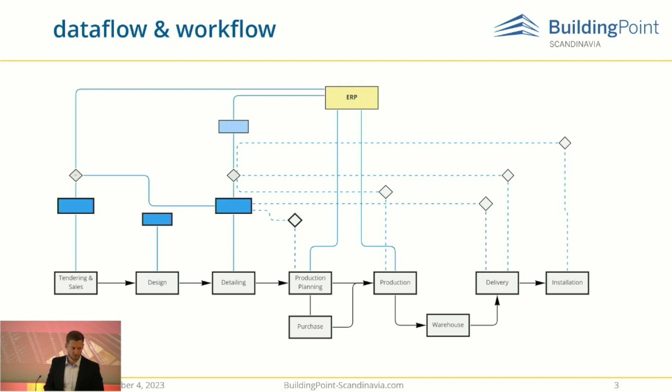Now let us jump into the Tekla part. I would like to show today Tekla when it comes to modeling, and it applies to any kind of elements, but most importantly it applies also to reinforcement. You have the possibility of creating those elements in 3D, but you also have different degrees of automation, depending on your need or your advancement.

So we can see there is manual modeling, which means that you can manually, in the 3D model editor, create the shape of the rebars exactly how you need. You can do all the reinforcement manually like that, and it's good, it's intuitive, and it's user friendly. But of course, if you need to do it every time, it will take too much time.

So you have something called custom components - it's a kind of small application that does this repetitive work for you, to make it faster and exclude errors. And if I manage to, I'll jump into Tekla so I can show it.

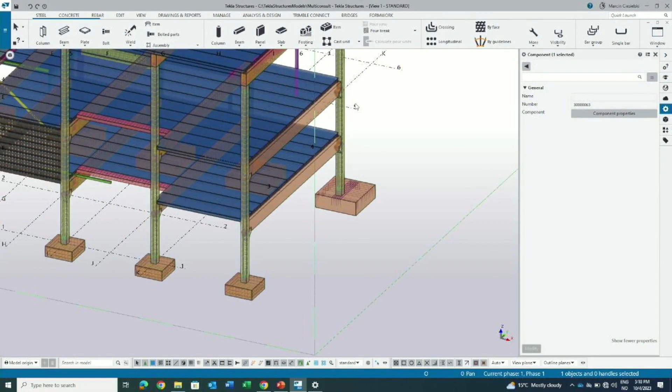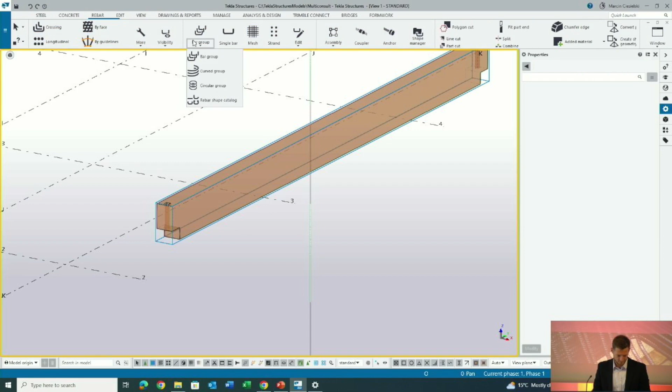There we are. Okay, so just briefly I would like to show how it looks. So basically, when we have a model - it won't be a full demo, just a quick look - we can create rebars manually.

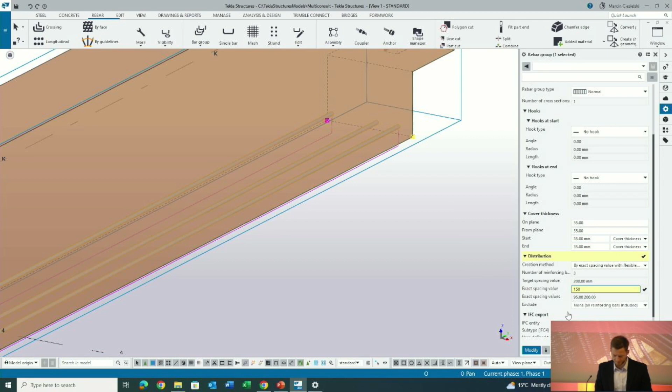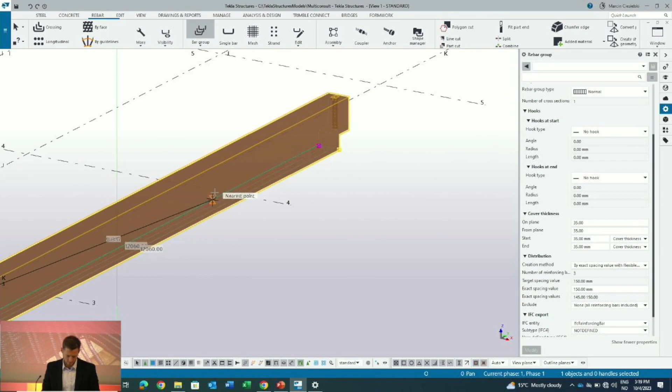We have a set of a lot of options. I won't do a full training now, but that's how it looks, just for those who don't know. It's user-friendly, really easy, and we create real objects in 3D. That's how we can create any shape we want - we can add hooks, etc.

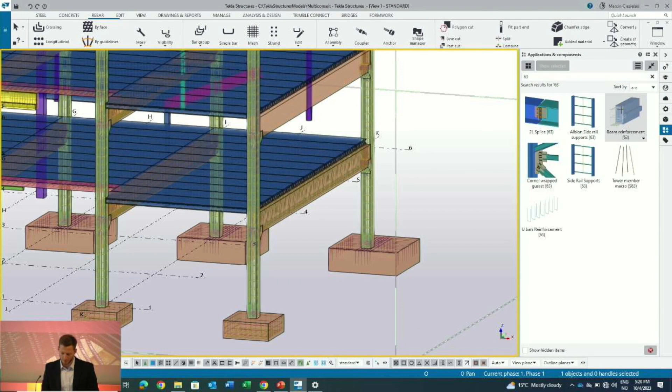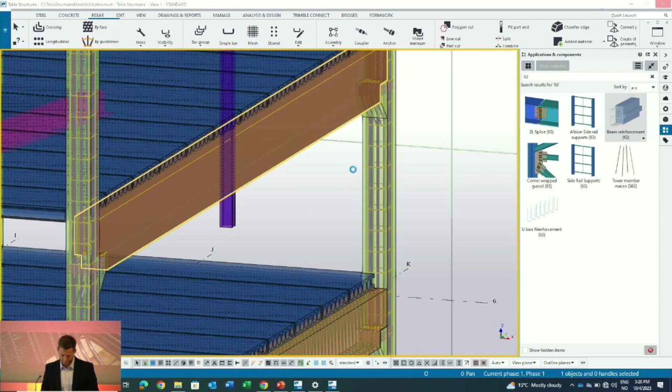But of course that would take too long, so there's also so-called custom components - we have an application that can do all of that for us with one click, if my internet connection is working, of course. No, it doesn't. Okay.

Okay, let me restore the internet connection. And come back to this.

That was just a simple demo of how it looks in Tekla, creating the reinforcement. And for some time, we'll come back to the custom components. But what is also important is that the 3D software gives you way more possibility than that.

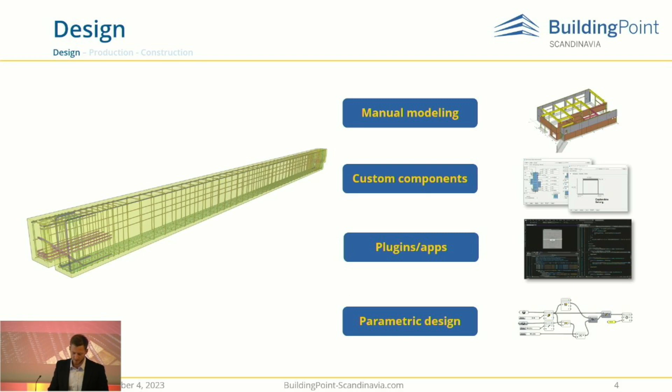So that was briefly about the modeling. Now let us skip to the next phase. As I mentioned, the BIM software in general is like a database where you can filter the information and get what's necessary, required in different places, stages, or machines. And here I mean, of course, the reports, the export to various file formats, production drawing, and IFCs.

Under production planning, we can use the reports, of course. The reports are also generated automatically, and they might be customized to your needs, so you can decide which exact information: the length, weight, material, whatever. You can decide to create a template and customize it, do it in a text file, Excel file, whatever.

But you can also move another step forward and drop the manual analyzing, sending this data information directly to the machines. We could also see it before in the presentations, how it works. In order to send this information to the machines, it needs to be readable by them. And here we come to system integration, and Tekla has a set of formats readable by bending machines, like BVBS. So after you model the reinforcement, you can export the BVBS format, readable by the bending machines, so we quit the manual bending and all possible errors.

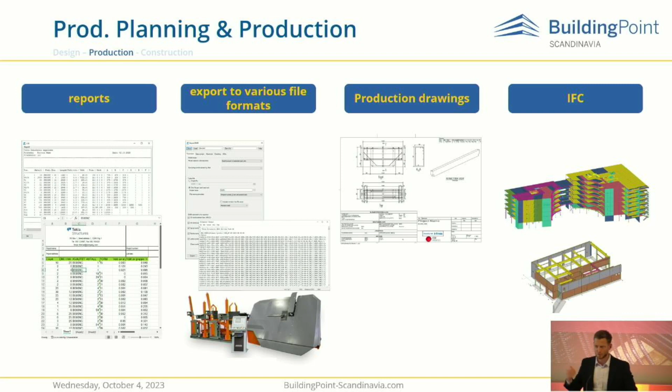And that brings us to the third stage, construction, which for cast-in-place is the same but is a bit different for precast elements. But here is the perfect example of how we can utilize the IFC and all the information included in it.

For that, we have Trimble Connect software and Trimble Connect AR, which you've also seen on a really nice slide, the LaceTag, how it works. So there's no need to show it again, but it's a really, really useful tool. The Trimble Connect is kind of a tool to visualize, see the IFC, and get all the necessary information.

And I would like to also show you live again how it looks.

But the thing is that IFC nowadays is kind of a standard. It's super popular, everyone agrees about the advantages of using IFCs, and they're used on building sites and factories and so on. But this creates kind of new challenges. So when I was talking about all the data, the model is like a database. IFC is like the geometrical representation of our model with part of that data.

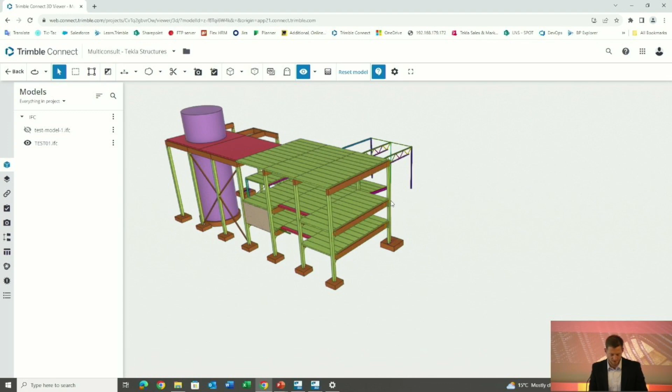This is Trimble Connect, the browser version, accessible through all browser readers. Through IFCs, Trimble Connect is connected to Tekla, so we always have an up-to-date model, whether on the production floor, the factory, or the site. It's a known problem that we use production drawings when creating elements, but we can never be sure if it's the latest update, especially when design happens at the same time as construction, which is actually very popular in Norway. Changes come in all the time, so having this connection between the IFC model on site or the factory with the model the designer is still working on is really important.

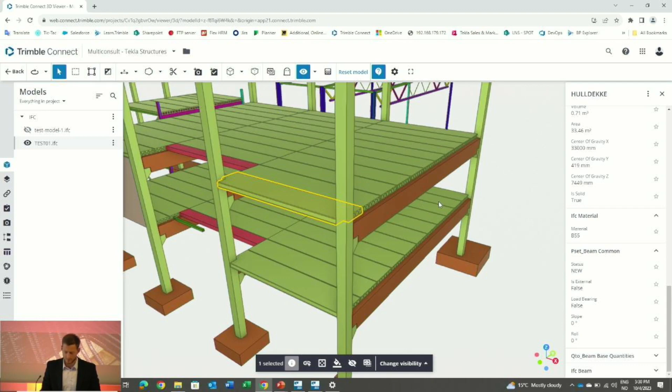Right away, after designers implement a change, they send it to Trimble Connect in the form of IFC, and then people on the site or factory always have the most updated elements, details, and information. Here on the right side we have an example of the information included, which we can also decide under export.

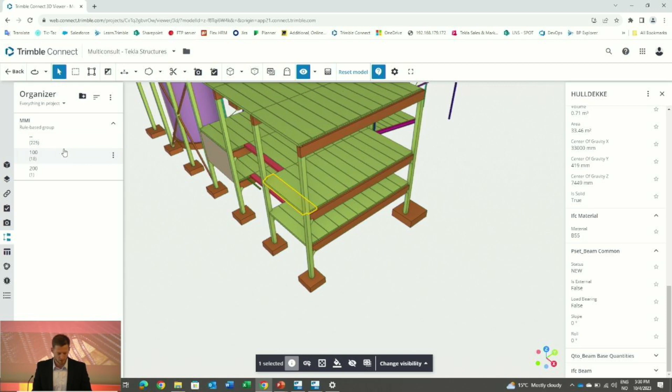We can filter and sort elements based on all that information. For example, here I have a group based on MMI status. So people on the site can easily find objects with a specific concrete MMI status, or on the factory they can check which element is going to be produced next.

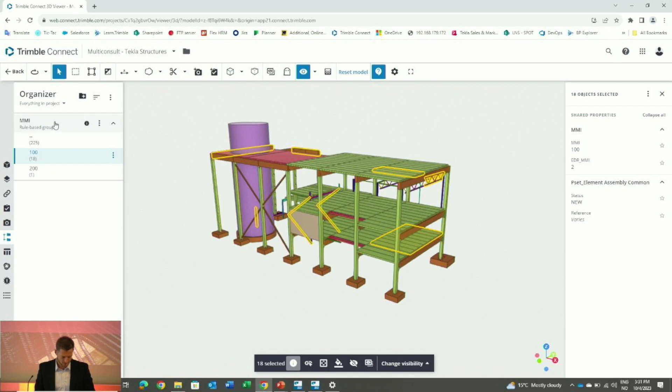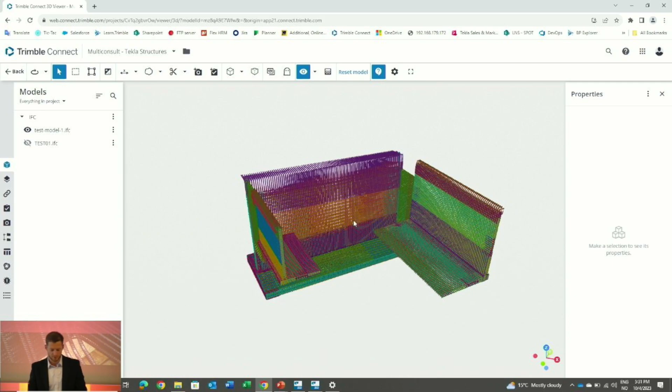When it comes to the overwhelming amount of data, this is, for example, part of the reinforcement from the bridge. The point is that with every single rebar there might come too much information, which is unnecessary for people on the site.

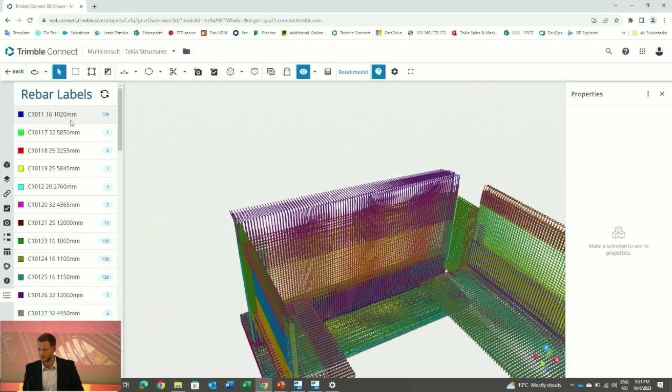So there's an extension created, Rebar Labels, which groups all elements based on specific attributes. In this case we have position number, the size of the rebars, and the length. It automatically goes through all the rebars in a view and groups them, so we can easily find which rebars from the site should go on the construction.

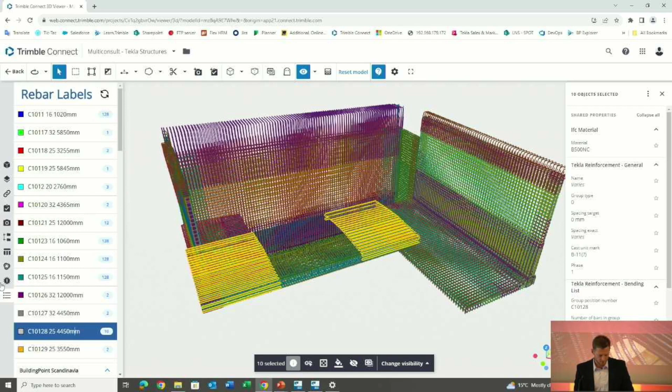Let's come back to our example, that was the custom component. Now with the internet connection I can show how it looks. We use the component, and it adjusts the reinforcement to our need.

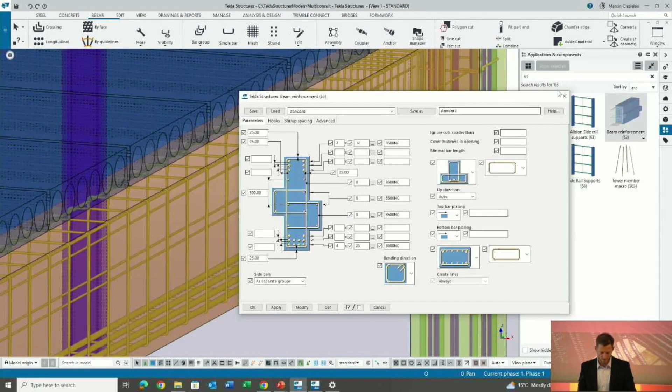Those were the three stages I wanted to show you, how it all works together, how important the model is as a database for all the other stages, and how we can utilize it on different levels. The work we put in during modeling, we can use later when we plan production, when we produce elements, and later on the site. We decrease the time and the errors, because when we can automate something, we reduce the chance of mistakes made by us, which is absolutely normal.